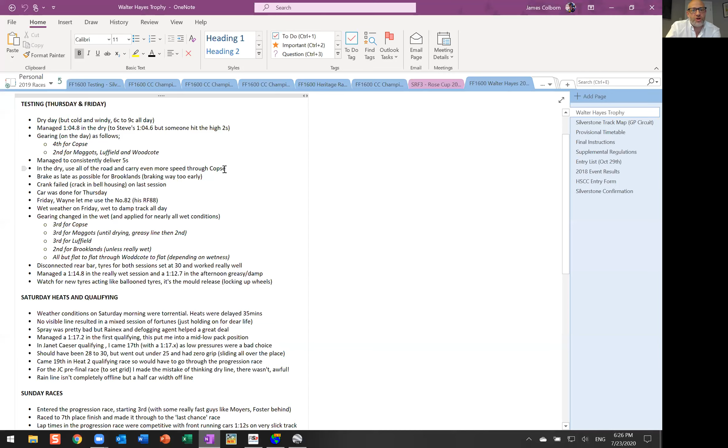In the dry, use all the road and carry even more speed through Copse, which was turn 1. So if I'm taking notes through the session, this is exactly where that is on the track. And so these are things that I started to work on. So the first thing I'm looking at is, are things progressing? Am I doing things relatively consistently? And am I doing okay?

And I think that there were some things that I did better than others and some things that were slightly inconsistent. The blue line in this was the fastest. And we'll look at consistency, because obviously we all know that one lap comparisons aren't always going to give you exactly what you need, because there could have been something that happened somewhere on track.

And I think someone mentioned earlier the excuse t-shirt. I'm still having that made. I can't find one that's big enough to cover all of the excuses that I want to put on, but I might have a series of those, one for every day of the week.

But in essence, what we're looking at here is the starting platform. Are things getting better? Am I starting to work on certain areas? So that's the first, simple analysis. Now I've got a few profiles that I've set up here. This is the GPS basic. This is probably my quickest go-to if I was looking at data in the 10 minutes that I was at the track. But now I've got a bit more time, I want to be able to have a look at a little bit more as I go through.

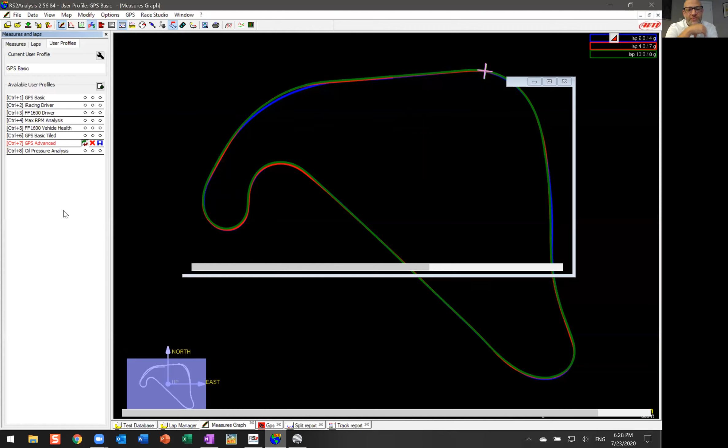And so I'm going to start looking at some other interesting aspects of this. So I'm going to scroll down here and click on GPS Advanced. Now this one, Roger and I were talking about how easy it is to click on the red X there. But if I click on this one, I'm going to get a slightly different view that's going to give me all sorts of new data points that I can start looking at to understand why and what I may have been doing differently session to session, to start looking at additional variables. I'm going to get rid of this just for a second, so I've got a little bit more screen real estate.

Spacebar, by the way. I'm sure everyone on this call knows, but the one question I always get is, how did you just do that? Well, I hit spacebar, and it's oftentimes a top question that we get asked.

On here, for anyone who's got a Solo, this is exactly what you can get in terms of analysis with an AiM Solo. You'll see later, and I've referenced this in previous seminars, that it was quite handy that we were doing GPS only, because I actually had to swap cars halfway through the event. So what am I doing better? Now it's a bit clumsy on here, so I'm going to get rid of one of the sessions to make life a little bit easier. Let's get rid of the middle one, because then we can see the biggest delta through the day between the 3 sessions.

And so now we can start seeing what's being done better. And you can see straight away that some of the key areas and corners, actually the back half of the track, I'm not really focusing there. We talked about it last time round, which is if it's okay, don't necessarily work on it. Or start looking at that later and fine tune after you've taken away the huge chunks of time gain.

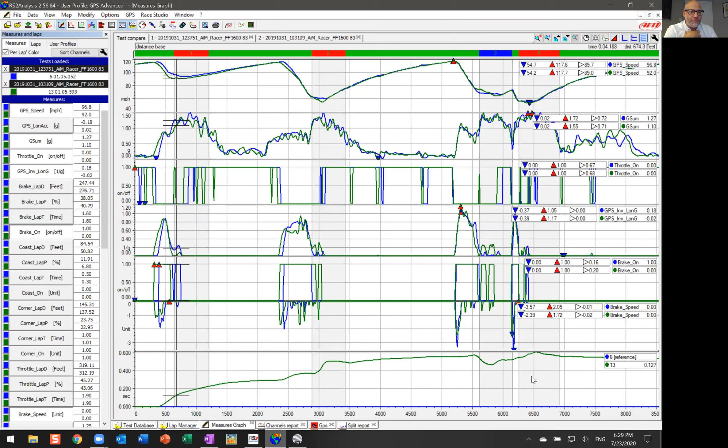And one of the biggest areas that I found, and it's one of the biggest bravery corners I think in the world, is Copse Corner at Silverstone. That is turn 1 at Silverstone National. And so you can see that as I progressed through, I was carrying more speed. And so that's helping me identify whether I started working on key aspects. So I'm relatively comfortable saying, okay, I'm doing things better, but I'm not over the moon with my braking. It's a little bit better.

This is the GPS inverse longitudinal here, which kind of mimics a brake trace. A brake trace would be nicer if you're lucky enough to have it, but this mimics it if you don't. And what you want to be able to see is brakes and then trailing off slowly.

And so these bits here, they're okay. But this is still braking, more braking. And that was at the beginning of the session. And this sort of improves here as well. So some nice aspects of what we're looking at here.

The other thing which I also like is confidence in the car. And so you can see that not only here have I started to brake later, but I'm actually braking harder. And this is a representation of the sharpest. This is thanks to Jeremy Lucas.

I said to Roger earlier, I'm a bit of a magpie with the analysis here. I'll just say, oh, thanks very much, I'll take that and apply it to my learning. And so that's been a huge part of this in terms of what's going on. And so I've loved that. So these are some of the things, but again, one lap analysis, all very useful.

But one of the things that I've thrown in here, and again, thanks to others on this particular event, is that I've added in a channels report. And on the channels report, I've added in some additional variables that allow me to look at sessions and see what happened within these sessions to see improvement that was there.

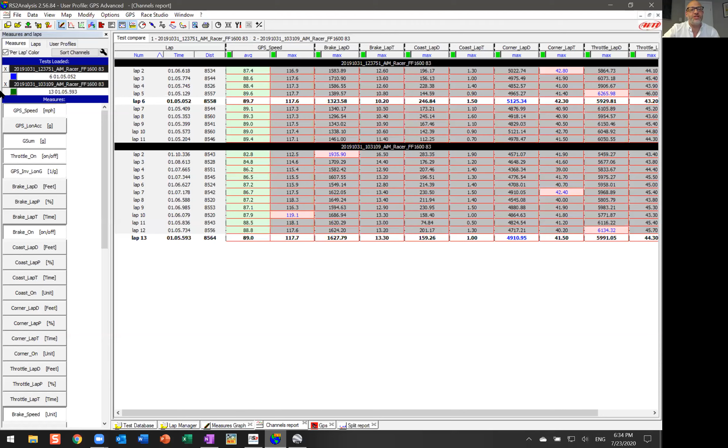So what I'm going to do is I'm actually going to close out. I'm going to pick just the one with the fastest session. The reason I'm going to pick that is, if you can see it here, I go to lap manager. One of the things that's interesting here is a little bit of consistency there. I would say that each lap was pretty close to the other lap. And you can see that here in terms of this reference. If it's got 100 there and it's not 101 or 102, they're quite close together.

Now, you may be thinking, oh, that's great. Well, however, if the fastest person on the track is doing 104, it's exactly the same as that. And all of a sudden, I've got myself stuck in a rut. And I want to be able to look at certain variables. That's where looking at other driver information will help us with that. But the other thing I want to be able to have a look at is that happening in different points on the track, and am I being consistent?

And so one of the things that many of you have seen me do before, it's my favorite thing to do, is I'm going to go to laps. And what I'm going to do is I'm going to pick my fastest laps. So there's one there. It's funny when you do this, I was so smooth when I was practicing on it. That one, that one, that one. And when you're on a screen, you're like, hold on.

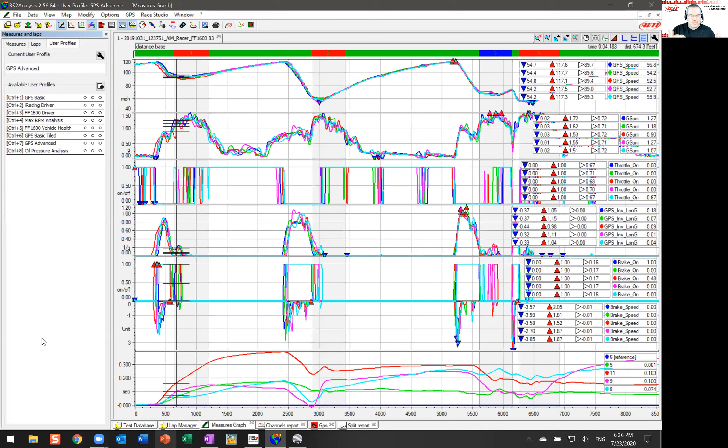Another question that came up really quickly while we were rolling was the note taking, from Grant. How do you take notes? iPad, transfer them straight to the laptop? He mentioned that real briefly. He does it on his phone, and he uses OneNote, right? OneNote, yep. Because he's got it synced between his phone and his computer. Note taking is a personal thing. Whatever works for you. Maybe it's a piece of paper, maybe it's a whiteboard in your trailer, whatever. But James does it electronically on his phone. That's his best place.

So, okay, James, head back in now that you got your laps all stacked up. Yeah. So again, right now it's sort of like, that looks nice. I can't tell a thing from this. I don't know about you. So what I generally do is, if you start selecting a lot of laps, typically you need to be able to adjust those. So I want to be able to see this is my fastest lap, but I want to see consistency.

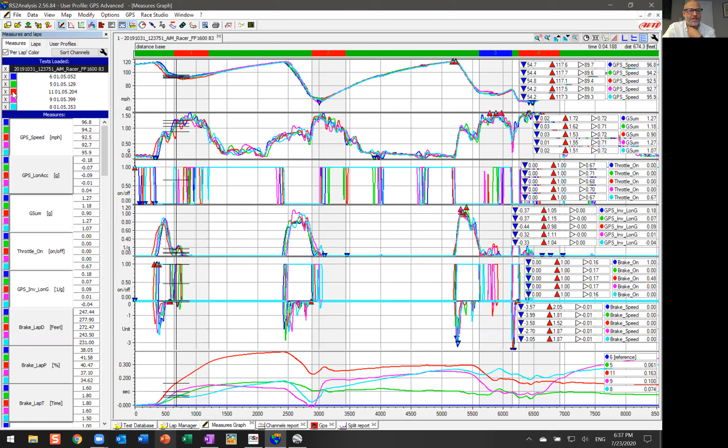Generally what I do is I go in and I change these colors. This is a great tip. This is one that I learned that was very powerful to me when I saw you doing it, and something I had not done. Perfect tip. So, thank you, Roger. And so there's that, and you may notice that the blue lap's at the back. And if we go in here and we just turn that reference lap off, and then we turn it back on again, it will now be the last one that's been enabled, and it will show up over the top.

Now, if I close down, I can start looking at areas of what Roger taught us as noise, which is where the lines are very close together, that's consistent. Where the lines are far apart, that's inconsistent. And that's areas where you may be able to work on. And this is where we start thinking about consistency and being able to see, are we doing something different? Are we doing something well or not so well? And this is where your excuse engine starts.

But in many respects, there's a lot of things that I think the blue lap here has done well. We can see here that it's taken the first corner particularly well and taken more speed through there. And you can see that there's relatively nice throttle application here. This is a little bump, that may be hesitation, that may also have been like, oh, lift, go. Who knows, but there's still throttle that's coming in there.

And again, this is GPS based, nice amount of braking that comes through that corner, and then acceleration coming out of the corner is okay, but there's still a lift. That could be a confidence lift, as Peter Krause often refers to them. And so again, something to work on, but it still allows me to carry that speed all the way down the straightaway. And so look what happens against all the other laps. That's a nice variable to be able to have a look at. Beautiful, beautiful. And so that's great.

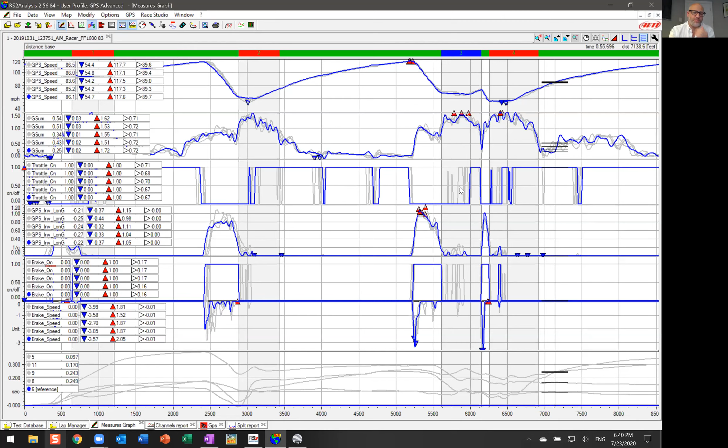But my favorite way of finding consistency is through the split times report. You can figure it out here, but there's another way of doing it, which is to break the track into segments. And what I've got here is if I open up the track map, you can see these are the areas where it's focused on. This is straight, straight, right hand, and so forth, all the way around the track. Left hand. Interestingly, only one left-hander. Never realized that until now. Funny, I've driven this track quite a lot now.

Maybe I'm not driving it right. But you only really, it's like if you're at Lime Rock, there's only one left-hand turn, I think. And so you're like, oh, okay, yeah. But interesting when you think about setup, do you set it up for right-hand corners or left-hand corners?

I think that's self-explanatory. But interestingly, I can now break it down into segments and say, okay, so what have I done well here? And I could open up another session and be able to say, well, there's so much inconsistency here that there's areas of opportunity. If I cleaned up that and I cleaned up this and I took each of these segments, not one of these laps, interestingly, the fast lap has only got 3 of the fastest segments.

But what if I took all of those perfect areas and then mapped them out? Now I'm looking at 104s. And you're like, ooh, that's interesting. Because remember, we're talking tenths here because we're all racers. We're not looking for seconds. Well, not straight out of the gate anyway. And so, you know, this is an area to be able to start looking at it.

Now, some of you may say, okay, well, hold on a second. How do you know what you did in 1 and 2 and 3? And that's why I've got it mapped this way, because you ignore the green bits necessarily, because they're sort of outcomes when you're going straight of how well you did in the corners. And so it's figuring out what you did in the corners and being able to find consistency.

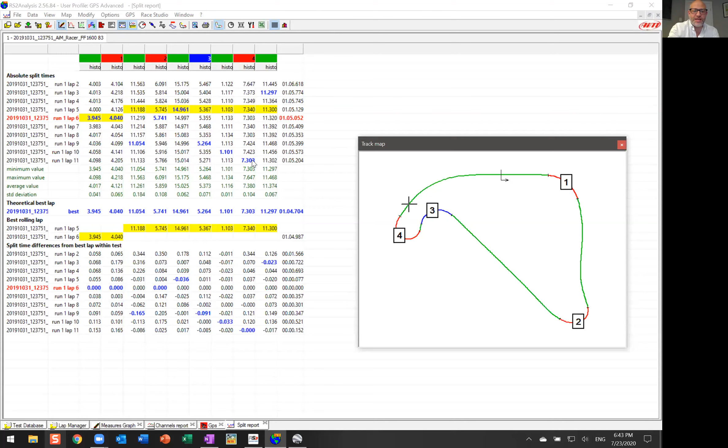The first, and we're going to pick on corner number 1 because we've already talked about this a little bit, which is the most amount of speed was taken through corner 1, which was one of the indicators. And we've talked about it all along. It's a confidence corner. And so if you can carry a lot of speed through that corner, but the question is why? Is it confidence? Clearly. But at the same time, is there other reasons? So there's 2 ways I'd like to look at that, which it could be line.

So the first thing we can do, seeing as we've still got these highlighted, is that we can have a look. I'm going to get rid of this so it's nice and easy for everyone to see. And we can have a little zoom in here and we can say, what did the blue lap do that the others didn't? And what did their line look like? And you can see, whoa, that looks like a nice line through there. But hold on a second. Is that a nice line?

Who knows? Well, there's an easy way of being able to figure that one out by taking the same laps, and it's almost like I rehearsed this. I took the same laps and I put them onto Google Earth. And I took all the other laps and I made them gray. Now, interestingly, you can't highlight the fastest lap the same way you do in the AIM software. You have to do something slightly different. So I'll show you what that is.

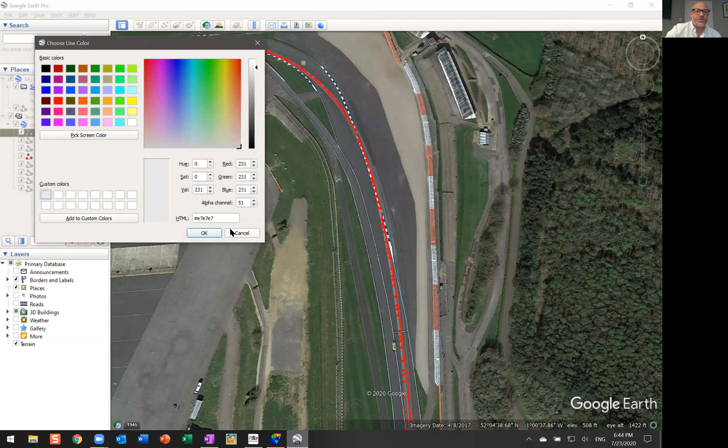I've kept all of these laps at all 105s, but if you right click in them and go into properties, not only did I change the color here and I picked a color, but what I also did is I changed the opacity here, or however you say that word. You'd think I'd have that one nailed in English, being English. But generally speaking here, I made it 20%, so it's faded in the background. So you could just see the slower laps that were there.

And then I can zoom in and have a little look. I can get rid of that left hand. It's not the space bar, it's this button up here if you're using Google Earth. But now we can start having a look. And it's interesting, when I talk to some of my colleagues and fellow racers, I'm still not doing as well as others were doing, that there's more road to be used out here to make the track even wider.

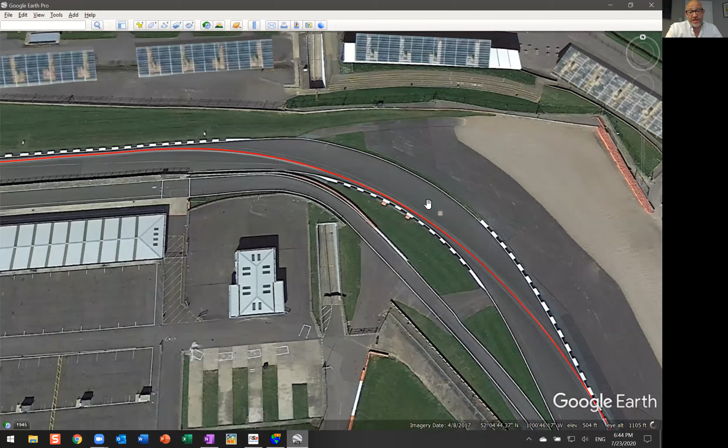But this is where it gets really interesting, which is using this part of the track and using a nice wide line, using some of the room. Don't go over here. That's 4 wheels off. That's not good. And so that actually happened here, which again, might have been fun at the time. But in general, you can see that this is a nice line that runs through that corner, and then it sort of creates a nice radius or an arc in that corner.

So you can now see, okay, so let's replicate what we did there and carry that through as we move forward every time we go through. And so if you don't have video, and interestingly, video will never give you this satellite view over the top, it's a nice way of being able to have a look at some of that data.

Again, this is why the end of the day is perfect for this, because taking the time to put this data into Google Earth, to be able to click on them, to change the view, to select the colors, it just takes time. And this gives you the opportunity of working through some of these variables as well. Now, that's some of the interesting stuff we want to look at.

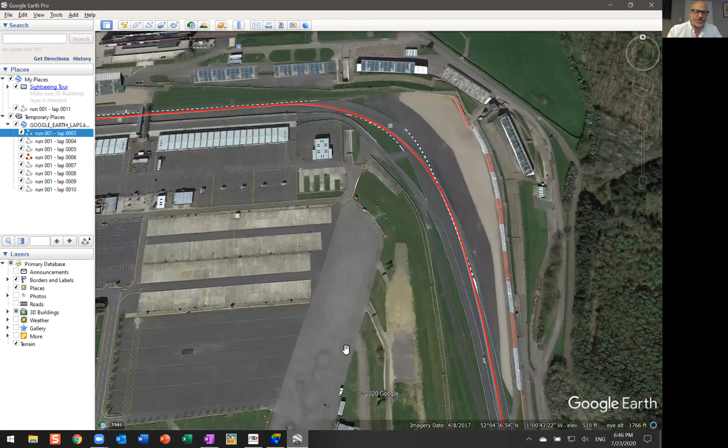But one of the things that we mentioned earlier was, how do we do against other drivers? So I'm going to go back into the Race Studio analysis. And I'm going to stop looking at my data and start looking at other data points to see if there's things that I can learn from other drivers who might be willing to share their data with you, and vice versa.

The one thing I love about racing, if you've got teammates or people who you're really good friends with, is that you're here to race and have fun. And of course we want to win, but the last thing you want is to be so far behind that it's not fun to have a race. Racing is racing against people. So we find that there's more and more scenarios where people will happily share data if there's mutual learning from either direction.

I think if you work with a pro, that's intellectual property and that's part of your relationship with them. And that's the way that I've always approached it. But if you're working in a team and with friends, you can always learn tons from each other just sharing data, because not everyone's going to be perfect at every point on the lap. Well, ideally anyway, that's the case.

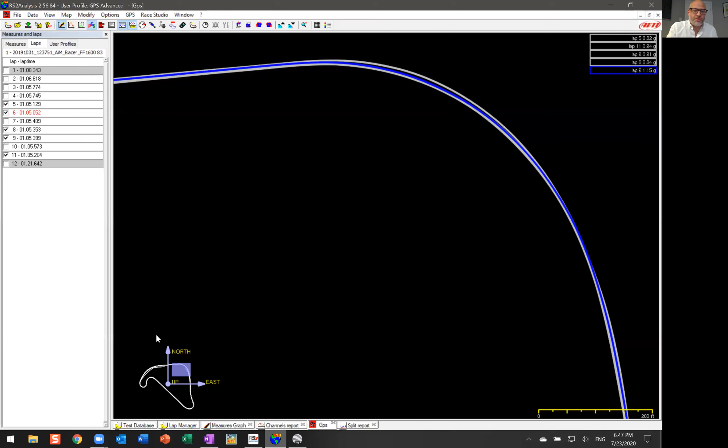So what we're going to do is keep that, close this session that's here, and open up two sessions. So I've got another driver here who's driving same time, same session, and I'm going to open up that session there. Now, the first time I opened this up, I was almost tempted to do a GPS lap insert,

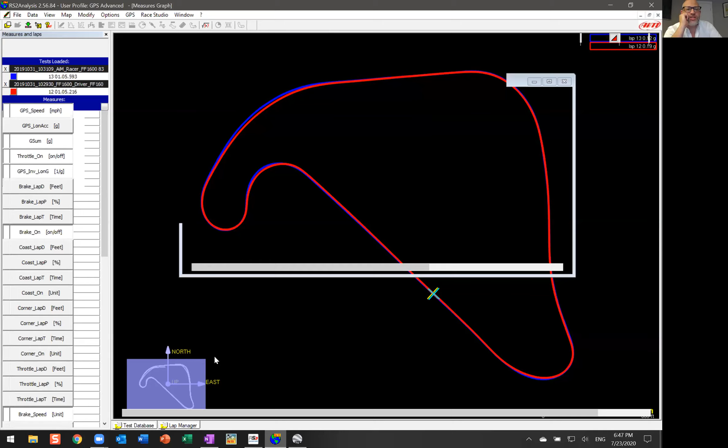which I ended up doing, because if I go to a simple analysis here, you'll notice that there's a lot of differences. I was like, oh, these seem a bit far off, maybe I should adjust these, but a GPS lap insert didn't necessarily change the timing too much. And I was like, okay, this is interesting. I'm blue and this other driver is red. So there's 3/10 in it. So where are they making that time?

And so looking at this, there's loads that you could deduce from here. We can see they're carrying more speed into the first corner. While this is slowing down, they're also taking it through, but then losing it. And I was like, ooh, look at that, gain that time back. A little bit of a bump here because they got on the accelerator here and I did here.

But what's going on here? This bit is the bit that I really wanted. That's a big one, isn't it? That's the one that's screaming, even with the simplest analysis that you have here. And I'm not even going to load up the more advanced stuff right now. I'm just going to show this, because I also said, all right, well, let's have a look.

So I use this handy dandy little function here called the delta function. And what I'm going to do is click it from here all the way down to the point of braking. And if I do that, it says that you're losing, just down that straightaway, the best part of 3/10 of a second, or 0.276. So, huh, that's in a straight line.

That's kind of unusual. And I'm sure, when you're presenting your screen, you can't see what people are saying. It's slightly different. When you're watching, you can see what people say.

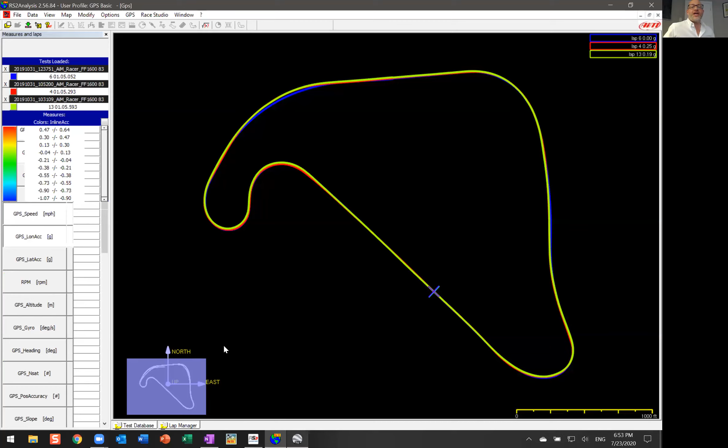Now, I'm going to close both of these sessions, and I'm going to look at the three here. These three have partial Evo 4S installations: we didn't have throttle, but we did have oil pressure, engine temperature, and RPMs. One of the first things you're going to notice is that I've learned a lot through these, and my sampling rates are slightly amiss on some of these analyses, but we wanted to have a little look at vehicle health. The reason is there's some things you can learn through this analysis to change your approach.

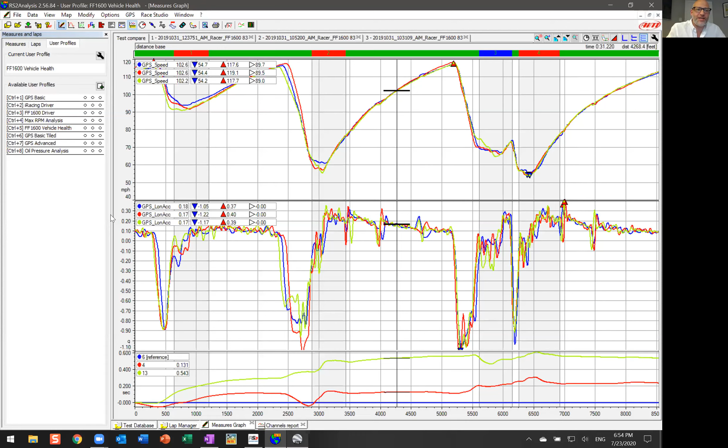So I've got these three sessions open, and the first thing I want to have a look at is generally Formula Ford vehicle health. So I'm going to load it up, and it's going to do its thing. Hasn't changed the lovely luminous green yet, because we don't need to look at that. And what we've got here is some aspects of information about the vehicle. So we can see certain triggers that are available from the channel.

Now, if you don't have these channels, as you start thinking about maybe wanting some different types of setups, this could be interesting to you. So I've actually created a trigger, even though it's not necessarily applicable, which is any time the oil pressure is below 30 PSI, I want to see how far I drove and the amount of time I was at that. Typically, I would have this set at 20 PSI, but for the purposes of demonstration, I wanted to show you something here.

So the first thing we're going to look at is the sensors that come without the need for math channels. We've got RPMs, oil pressure and water temperature. So we can see minimum, average, maximum. Interesting to see the progression of the engine temperature. No radiator fans on Formula Fords, well, the Formula Ford that I have. So it's interesting to keep monitoring the average water temperature to make sure you've got engine health there. And is it spiking a lot in terms of max? Nothing too untoward there.

Same thing with oil pressure. It's relatively consistent in terms of the average. But I have got some minimums which I've set a trigger on. I'm going to scroll over to the right to do a little bit more analysis. So the first is, have I dropped below the minimum oil pressure trigger, and how much did I drive on that low oil pressure? Here you can see I drove 1.3 seconds below the target, or 154.2 feet. This is useful if you really do have a low oil pressure warning you want to trigger under 20 PSI, because then you can look at additional information, and I'll show a little of what that looks like.

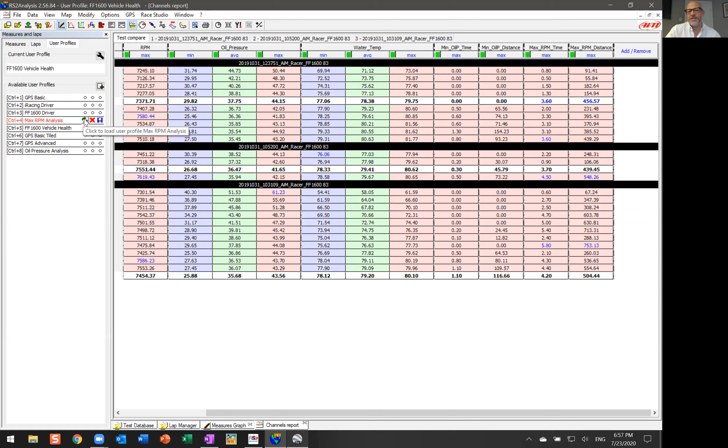You know, when you race for a decade, you do make mistakes. I'm sure we've all experienced something or another. As we look at this, we can see that, okay, I want to address some of these sort of variables. Now, what I've done here is I've created a max RPM analysis. So I'm actually going to trigger that one, and I'm going to load that up because I want to be able to see, is it driver or is it potentially gearing, taking that rev over a certain threshold.

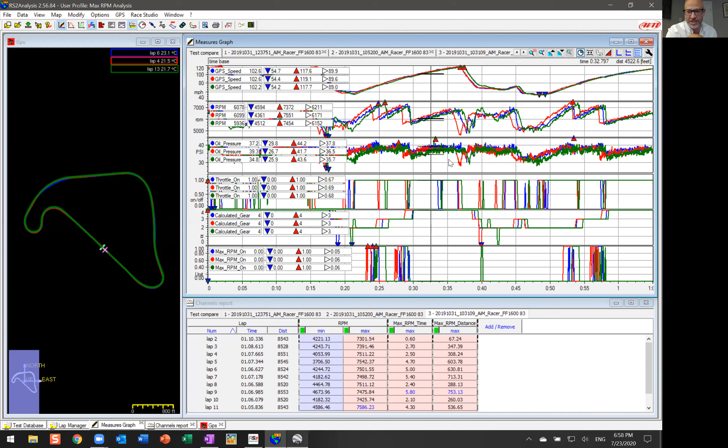Before I do that, I'm going to get rid of the lovely luminous green. Hold on a second. Just change that to a green here. And this slide's a bit busy, so you may want to be able to change it and have a look elsewhere. And first thing is, you can see that my sampling rate's a little bit all over the place. Got to fix this one, but we'll do that next time. And again, learning experience in terms of installation, in terms of the amount of sampling that we're getting.

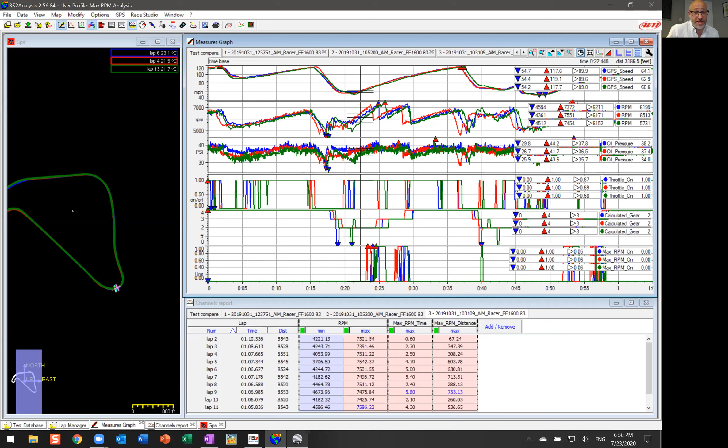But at the same time, what you can see here is I've got a point, and this is a math channel that I've created that says, create a trigger every time you go over 7,000 RPM. The reason I've got this here and this here is I can see where that's happening. So this is happening here, and it's happening consistently here at this particular corner on the track. I can zoom in and show you where that is. So the nice thing is being able to see where it's happening.

Now the next question is, well, hold on a second. I'm not sure if that's a gearing issue anymore in terms of the revs hitting over a certain threshold. It looks probably driver. And so what I've also got is a calculated gear that says that I'm in second gear, and this is the second to third gear shift that is there. And so I'm just letting the engine rev out too much in this particular point on track. Now it's interesting to understand, how do I want to change that? Do I want a short shift here? Do I want to carry it through in third?

Because the other thing is that I'm a little bit busy at this point as well, because I'm also turning. And the last thing you want as you're inducing quite a lot of G-force is to then take your hand off the wheel, reach over to grab the gear change and make sure you put it in the right gear. Because I'm sure some of you may at times have over-revved your car, and sometimes that's due to the fact that body position's in a slightly different place, and that third to fourth gear change is actually third to second, which sometimes is an ouch.

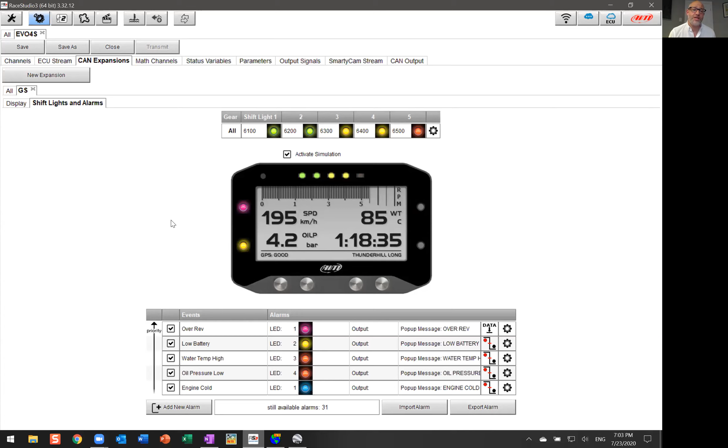Now, it's important to remember what the lights mean, and interestingly, you can activate the simulation if anyone's actually interested. These are the two that I really pay attention to, and this is almost like an instant stop, so to speak, in terms of your water temperature's gone off the charts or your oil pressure's dropped next to nothing. That is like, pay attention right now. Whereas this one is an over rev, don't do it again, and this is a voltage indicator. Again, different things that you can look at as you go forward, but all of these things combined together give you your manual for what you want to do.

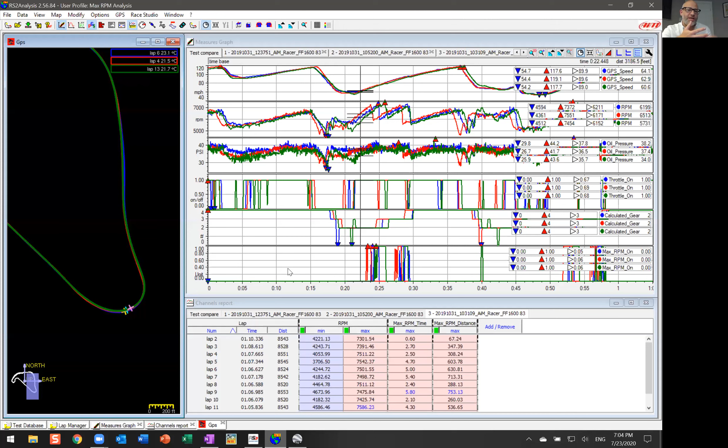And so just as a quick recap, as we close out my part of this session, the first is, when you're looking at driver consistency, split times, understanding what you're doing in segments, looking at line, looking at driver inputs. When you're looking against another competitor, I didn't do it because we're short on time, but a split time analysis on that is also the best thing to do, because just as Roger identified, by looking at their data and your data, they're doing something well somewhere, you're doing something well elsewhere.

A split time will allow you to identify that, pick out what they're doing, and try and replicate that on track with the driver inputs. And then the final thing is to say, okay, let's make sure that my setup in the car, which is what I have to remind me what I'm supposed to be doing, is configured in the right way to ensure that I try desperately hard not to replicate what might have arguably been damaging the engine.

Even if you don't consider that to be engine damage, the general school of thought, and this is important to know in terms of your power curve, is that anything over 6,800 RPM in a Formula Ford engine is nothing. That's just noise. It's gone. You're out of the top curve of the power band. Don't go above that. You've got no power. So it's one of those things to think through, which may also indicate some of these things. And so with that, Roger, I'll stop sharing and hand it back to you for the close.

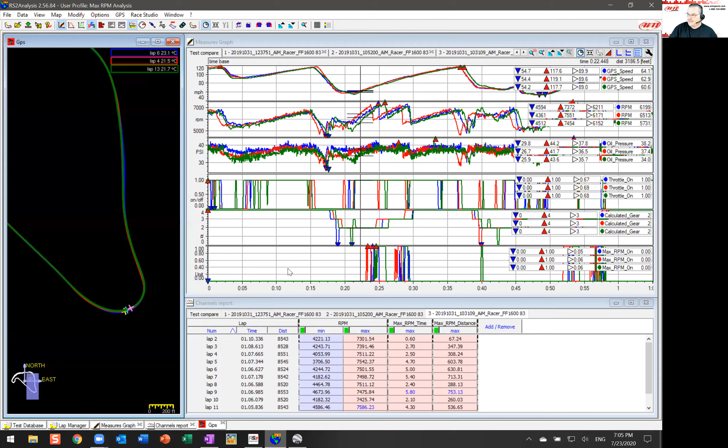Perfect. There's a couple things as I go back to the presentation materials. Very, very cool that you went over some things and used some fundamentals that I think are important. What happened? Where did it happen? Why did it happen? You followed that same path on virtually everything you were just talking about, and I think that's just wonderful.

Michael had a question there: you're talking about a car without a rev limiter. That is true. In this particular case, he does not have a rev limiter on that car, so it's one of those things he really wants to keep an eye on. The car does not have an ECU and a rev limiter, so he needs to keep up on that. James, if you look over a couple of those questions, I'm going to jump to the next slide, and we'll hit a couple more questions on our way out.

James, you see any questions and answers there that kind of fit in with your presentation? I actually think that there are a few. The first one I like is, how can I identify if the tires are not working properly, or if it's just a problem with the driver and it's not using 100% performance of the car? That's a deep question. I think this could actually be a really good session. But there's a few things that we can look at here.

The one that I've been working on, and it's a development for me, is understanding something called GSUM, which I think is a great indicator of how much you're using of the car and whether you're using its maximum. There's other variables which I've seen and experienced, which is sometimes you can look at steering angle in the car, and you can look at lateral, and you can see where the driver is turning the wheel and the car might be understeering, or the car might be oversteering and the driver is correcting with the steering wheel.

So that might be interesting to be able to look at, that the tire conditions have got slippery, and all of a sudden there's a lot more correction that is being made by the driver by nature of how their driver inputs are responding to lateral input. So I think that would actually make a good seminar in the future, because tire performance is a fascinating one that has track conditions. Yeah.

But as you do that, the most important thing here to be able to note, and the best thing to play with on this one is iRacing. In iRacing, you can change track conditions through the day of exactly the same track, and you can look at what happens to driver inputs in terms of steering and performance. So that might be a fun one to have a look at as well. But I'd say there's a few ways to look through that sort of aspect. Is it the car or the driver, or what's not working? Yeah, I think perfect.